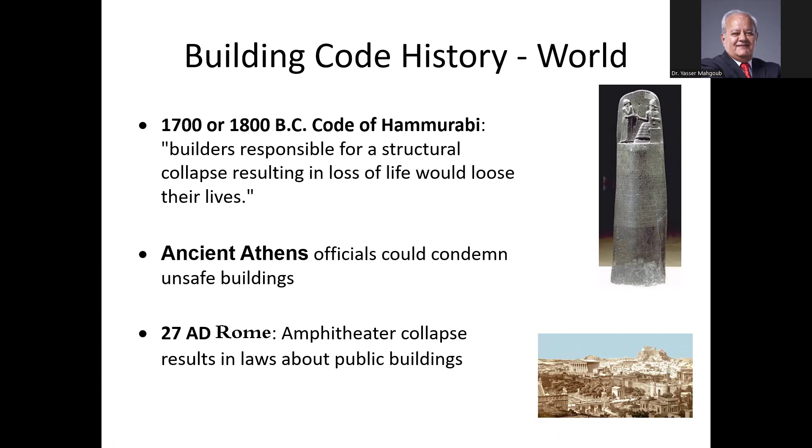Other codes became available in ancient Athens, where buildings should mainly be safe for users. Also in Rome, there was an accident of an amphitheater collapse that resulted in laws about public buildings. So they started to have laws from that time.

A very important event happened in London in 1189. It was called the London Fire. The whole city, or large parts of it, went up in fire because of the building design, the building material, and the urban fabric of the city at that time. From that time, they started to require firewalls between houses.

It's exactly like what you have here in the countryside. If there is a fire in one of the peasants' houses, it will spread all around the village because of the materials and the compactness. So from that time, people started to realize we cannot let architects do whatever they like. We have to have codes that protect human beings and welfare.

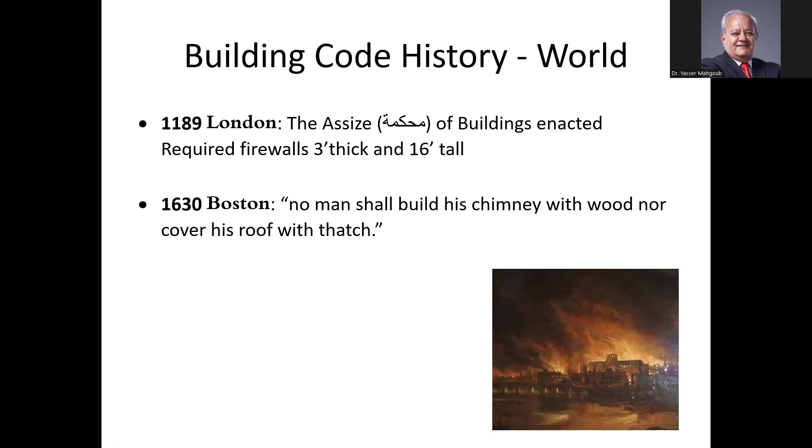Also in Boston, in 1630, the code started to say no man shall build his chimney with wood, nor cover his roof with thatch. This is to eliminate any hazards of fire. So these accidents alerted people to the importance of building codes.

Building codes are complex documents. They are not easy to understand, not easy to implement. They require good study. The main purpose is to protect the building occupants, and this is our main goal. So we consider the building codes and regulations a minimum, not a maximum. You are welcome to add more protection to the users than required by the building codes.

Firefighters and emergency personnel become in a very vulnerable situation when there is an earthquake or fire. So they need to have all the equipment, all the passages to save the people from the hazard. We also work on the building itself and its relationship to other buildings and the community at large. So building codes have several levels, but the most important is the people.

Protection, of course, from fire, which, as we said, in London it started the thinking about this idea. Structural collapse, earthquakes, and other structural failures. Health and safety hazards, including smoke. Most people during a fire don't die from the fire itself. Fire doesn't kill, what kills is the smoke and the escape. They inhale a lot of smoke and can't find the escape routes, or the escape routes are crowded, so they stampede on each other.

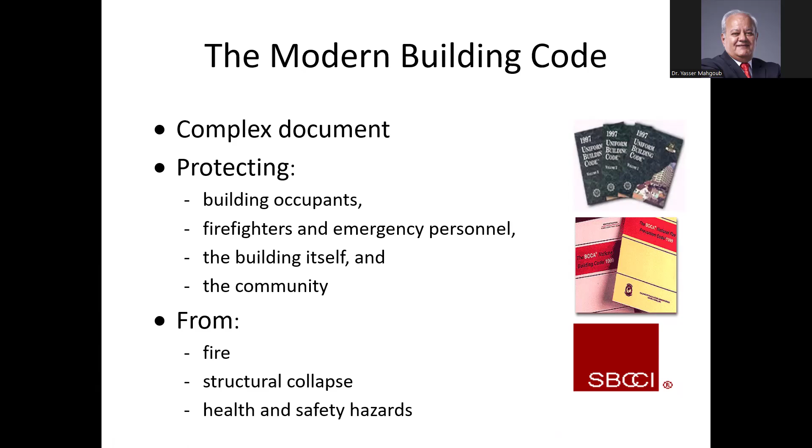So this is very critical. As we said, building codes and regulations provide minimum standards, not maximum. Consider them a minimum standard to safeguard life, limb, health, property, and public welfare. This is our main and first target: regulating the design, construction, quality of materials, use and occupancy, location, and maintenance of all buildings within the jurisdiction.

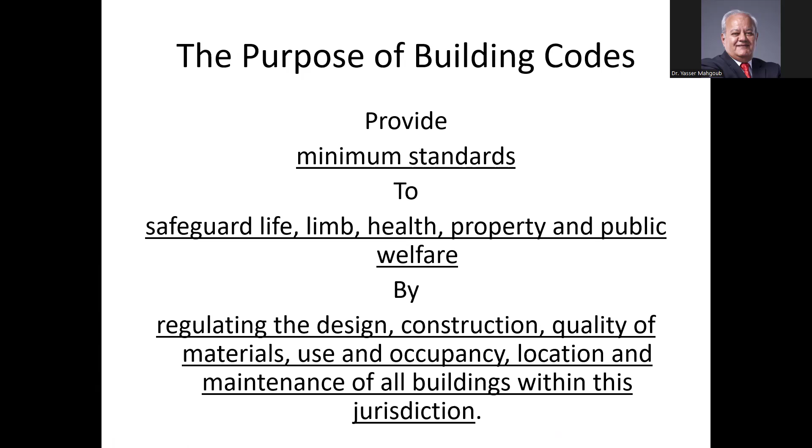So we want to stress this: the main purpose of the building codes is to save the people, to safeguard the occupants.

What if there is no code? You are building in the desert or on vacant land. You have to create your own code using reasonable care to protect the people who will occupy this environment.

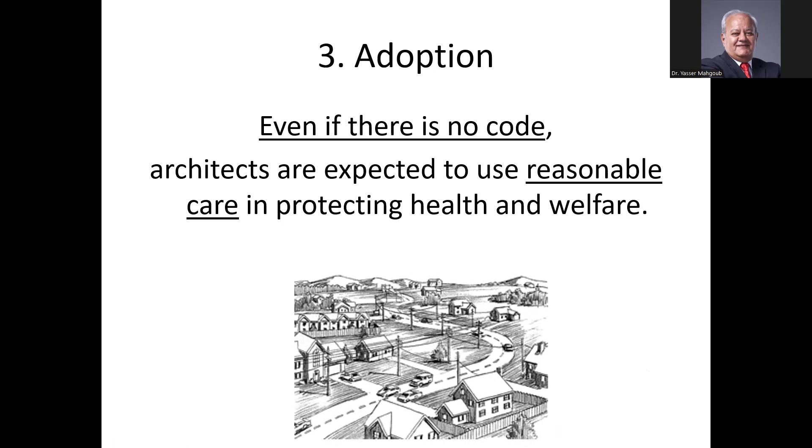What do building codes cover? They cover specific design and construction requirements, occupancy—how many people should be living or working in one place—and building height. They put limits on building height, 20 meters, 30 meters, 15 meters. That affects the skyline of the city, air movement, and everything.

Floor area: we have standards for floor area use. If you limit the floor area, you know how many persons will be in that place. That's important because once you know how many people are expected in a building or community, you can design the infrastructure—how much water they need, how much sewage they will produce, how much garbage they will produce. All these aspects relate to the number of people, and the number of people is decided by the floor area.

For residential areas, for offices, for hospitals—each building type has its own standards. We studied that in the programming lecture at the beginning.

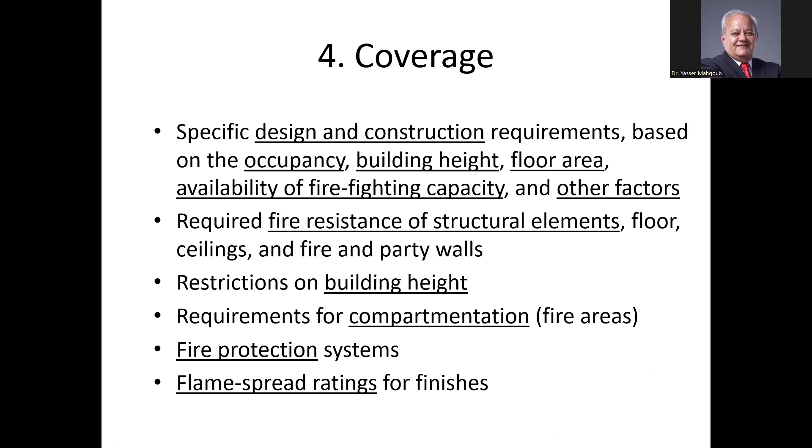Fire protection systems and flame spread ratings are also important. Egress means the escape routes from the building—stairs, corridors, and doors. Elevators are not considered egress; during fire or other hazards, elevators must stop. You also have to think about how disabled people will exit during an emergency.

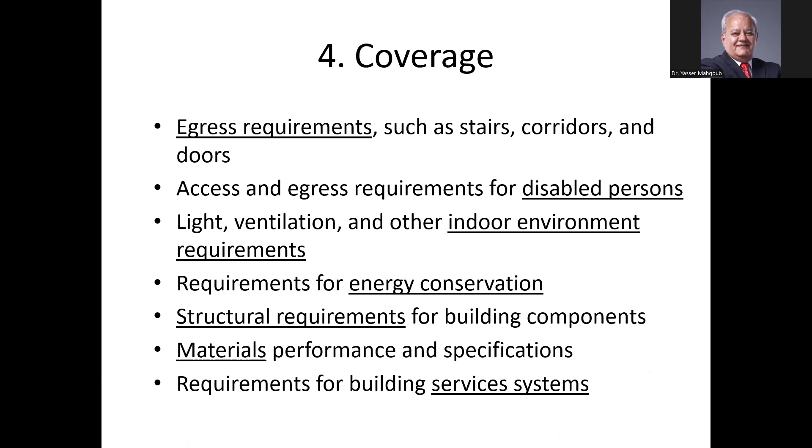Light, ventilation, and all indoor environment requirements. Energy conservation, structural requirements - there are building codes especially for structural requirements, calculations, amount of steel, the composition of concrete, everything is stated in the building codes. Materials performance, services, plumbing, water, electricity, communication, and so forth.

There are two types of codes similar to the specifications. We have prescriptive requirements - they indicate exactly what is needed to be done for every element of the code. The other type is performance requirements: what are the desired results from the design? It leaves up to you how the materials and elements are selected. Usually, governments prefer the prescriptive requirements because it can be followed by everyone.

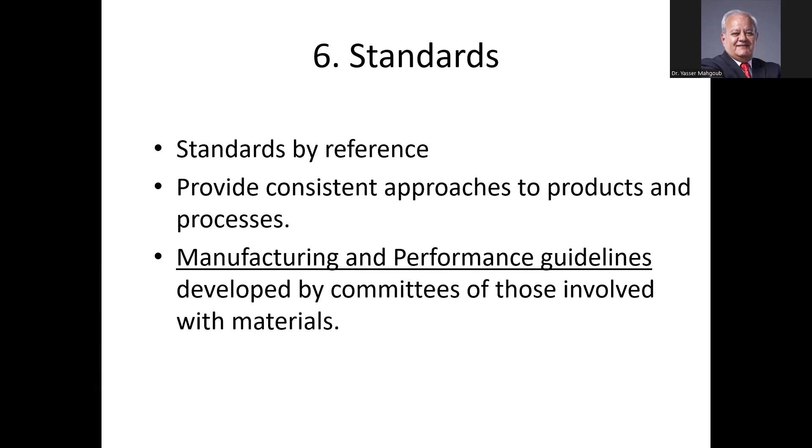Standards can also be used by reference, or provide a consistent approach to products and process, manufacturing, performance guidelines, and so forth. Who is doing the building codes?

There are agencies that are specifically working on building codes, making sure they are followed in the design and construction, and update them every while so that they are changed. They can be changed, so you have to make sure that you have the latest building codes and regulations.

Printed document by the government, and they're usually sold in the Amiri print house, which is located in Al-Ataba, Al-Opera Square, near Al-Ataba Square. There is a shop there that sells all governmental publications, official governmental publications, and you can buy the books from there.

What you need to do is to review by the enforcement. You need to review the drawings, issue building permits. So when you do a project, first of all, you have to do a permit for construction. You cannot just go and build. You have to get a permit, and the permit is based on drawings that you submit to the governmental agency that issues the permit. And they give you a permit to start construction. And then they come back and check whether you followed the same drawings or you have changed something during construction.

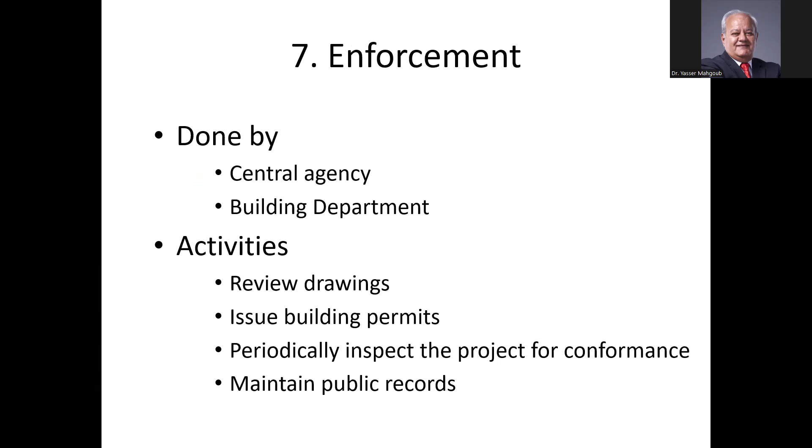Periodically inspect the project for conformance. Many people submit drawings, called in Egypt 'license drawings,' and then they do something else - they increase the size, they increase the height, they change the use, the function. The agencies must come and inspect the conformance to the license or the permit, and maintain public records of the building and construction, materials, use, and so forth.

Before the building is occupied, you have to issue an occupancy permit. After you finish the whole thing, you have to get an occupancy permit. And this is where the research post-occupancy evaluation came from, because it is after the occupancy of the building.

After the building is occupied, it will be under the control of the fire marshal. They must have access all the time to the building. And if you design an urban area or a complex, you need to make sure that the fire hydrant, the fire car, and the ambulance can go through - cannot just make everything blocked. So the design must allow emergency services to enter.

And also the jurisdiction to compensate for confusion caused by jurisdiction overlaps. The most conservative advice is to design according to the most restrictive requirements. Don't try to find loopholes in the law. Follow the maximum, as we said, and even more.

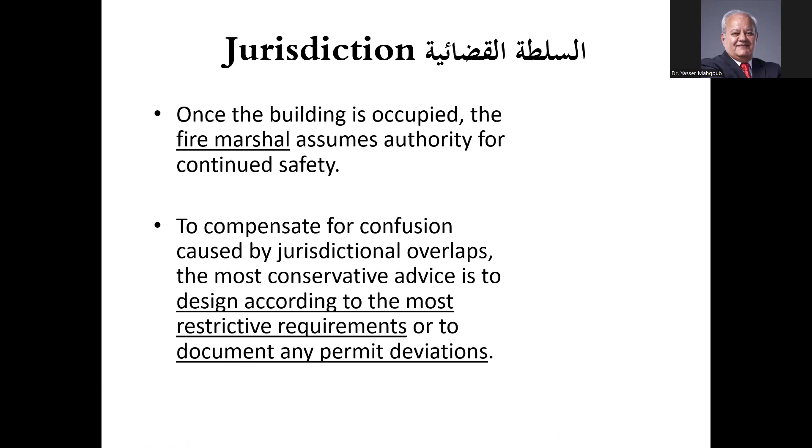So the project may require or will definitely require a building permit at the beginning. You apply for a building permit with drawings, land contract, forms, and so forth. And then you may need other permits. You need a permit from the fire department. You need a permit from the structural department, from the air aviation. If you are close to the airport, you need to have an aviation route permit. So you need to look for all the permits before you start construction.

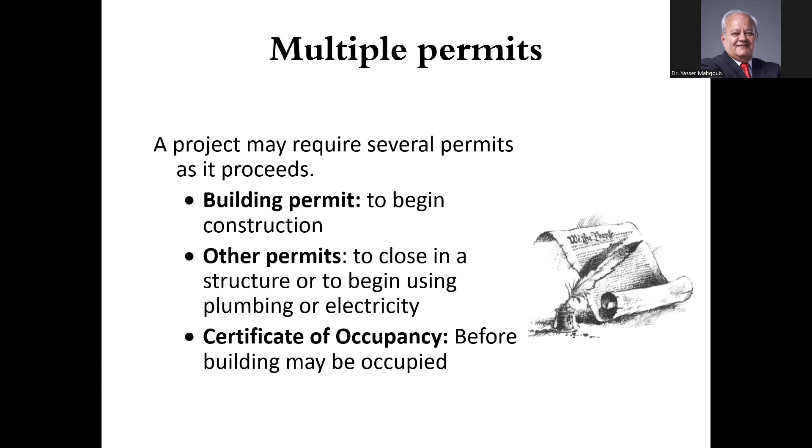And then at the end, you'll have a certificate of occupancy or occupancy permit before the building may be occupied. Appeals are also possible, but...

Other building regulations for fire. No, we were stopped here.

Variances - you can apply for variances from the code or the regulations, but don't take it for granted. You can apply for more floors, more space, the change of function, but you have to apply and get the approval before you make the changes. And make sure that variances apply to one project at a time. Don't assume that your neighbor received a variance that it applies to you. No, you have to get the approval for yourself, not based on the other precedent.

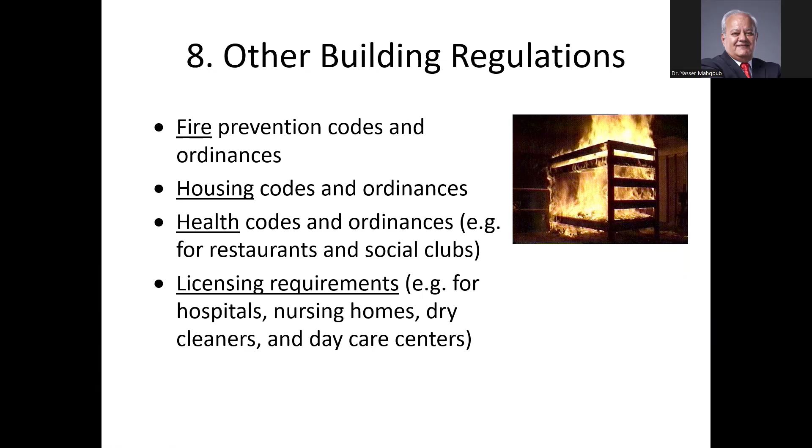There are many special codes for fire prevention, housing, health, and so forth for different types of buildings that you have to look for. What is your duty as an architect? Your duty is to follow the regulations closely and even go beyond them to protect the people.

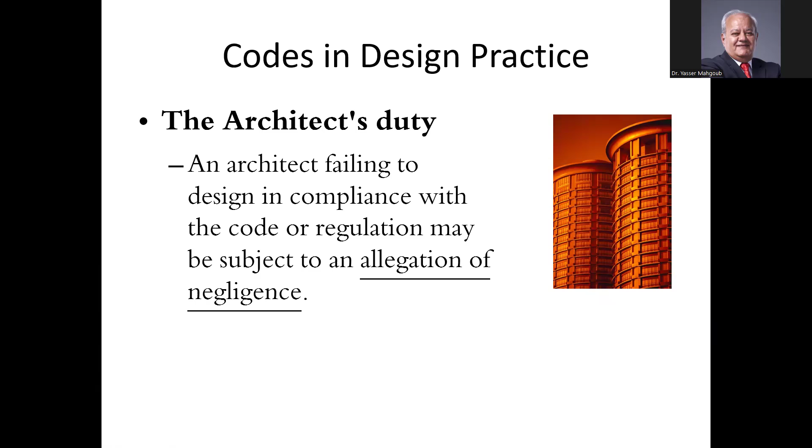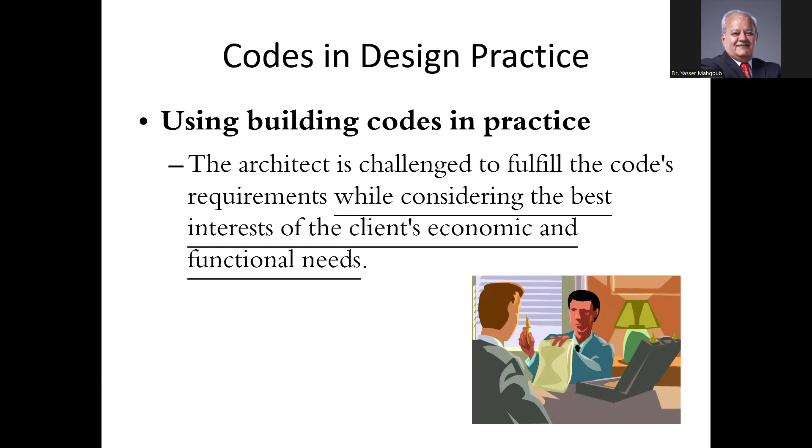The building codes in practice are very important. Even if the client does not want to follow them, your role as an architect is to push the client to follow the codes and regulations, because it will affect you, your work, and your license.

Search for all the codes. There are architects specialized in code compliance who make sure they have all the recent codes and that all projects comply with these codes and regulations. This is a very important control check for projects. Projects might be excellent, beautiful, and creative, but if they are not complying with the codes, they are out of the question.

Code provisions should be perceived as an ingredient, not an option. And as we said, you need to go above the required code.

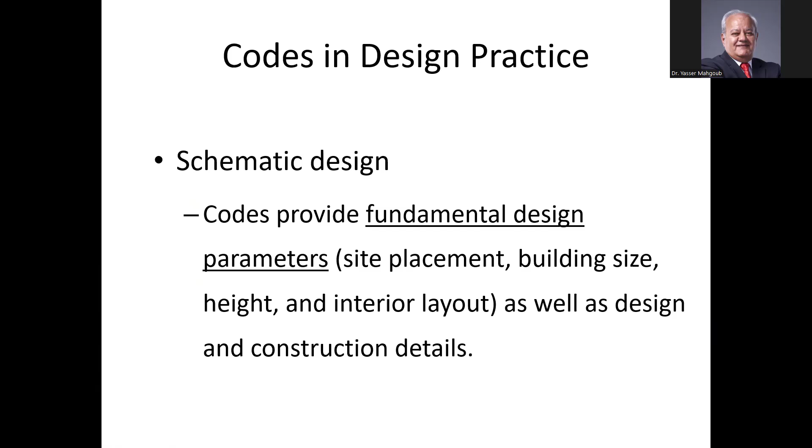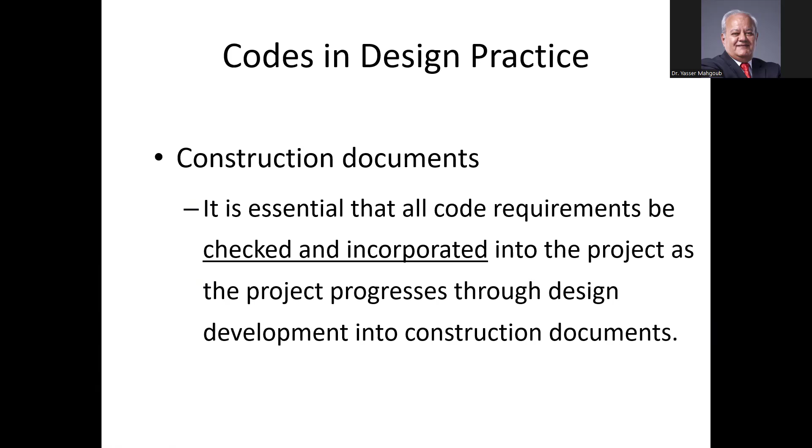At the schematic design stage, you need to provide the fundamental design parameters applicable to the code: site placement, setbacks, building size, height, interior layout, as well as construction details. In the construction documents, you have to carefully check the application of construction codes, building codes, structural codes, and electric codes. All of this has to be complied with.

A brief introduction to the Egyptian building codes. This is the code that is currently applied, number 119/2008.

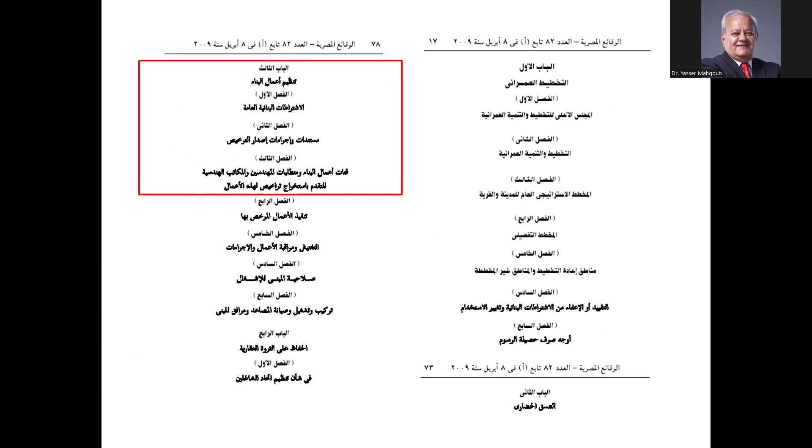طيب طبعا بتدخل بقى على الباب الثالث. بيكلمك على what are the required documents to apply to submit and inspections and so forth.

الديزاين. يعني بيقول لك مثلا ايه، لا يصرح باصدار تراخيص بناء لاي مبنى على اي قطعه ارض الا اذا كان مطابقا لاشتراطات التخطيط. دي بند نمره واحد.

فانا عندي هيئه عامه للتخطيط العمراني طلع دوكيومنتس تخطيط الاراضي والمساحات بتاعتها، لان هم بيشتغلوا على الاربن ليفل. they have to control that.

يكون الحد الادنى الصافي للارتفاع الداخلي للطابق الواحد مقاسا من مستوى السطح النهائي للأرضية حتى بطنية سقفه الظاهر في جميع الأدوار 2.7 متر.

ويجوز أن يقل الارتفاع المذكور إلى 2.3 بالنسبة للمداخل والطرقات الداخلية والحمامات وغرف الغسيل. فأنا minimum 270 for rooms but it can be 230 for corridors and services.